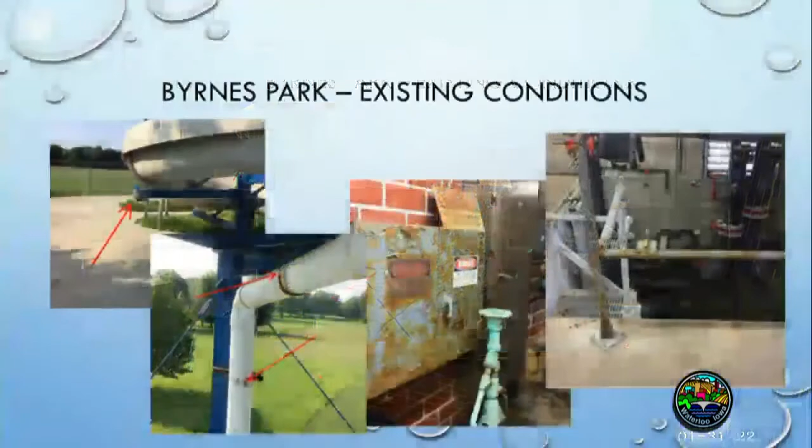Quick question for you - how many of you have been out and used these pools? So you see what I see then, and probably looked at it, but have you gone into, say, the pump room or looked at some of those pieces?

Anyway, going through the conditions - Byrnes Park, first of all, the 2 pools are basically the same age and same type. They are Chester aluminum pools, which means they have a concrete floor. They have an aluminum wall system, which is buttressed - in other words, there's a brace behind the wall panels that holds them in place. That's going to become important in a few minutes.

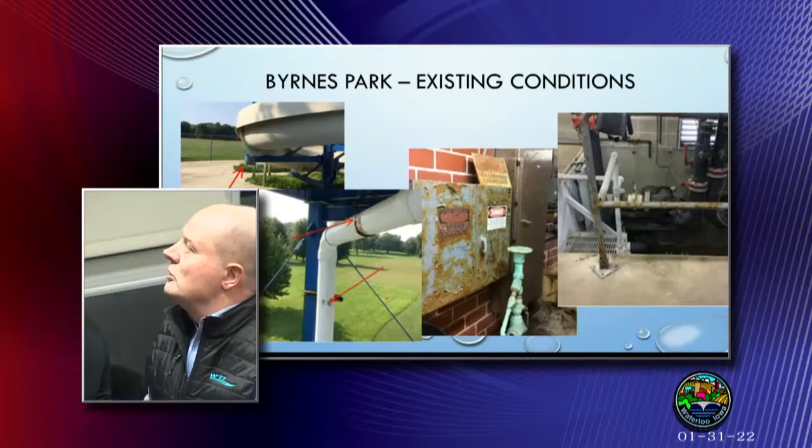General condition assessment is that they've been maintained, but maintained over the past 10 to 20 years by gosh and by golly. That's not anything about the staff - it's what they've had to work with and some of the challenges. For instance, in the images you're seeing of Byrnes here, piping is no longer supported - the pipe supports have rusted away. You have movement in pipe that could fail. Your electrical boxes are rusted, not only on the exterior, but you're probably going to start seeing some arcing in some of that. So condition is just generally poor.

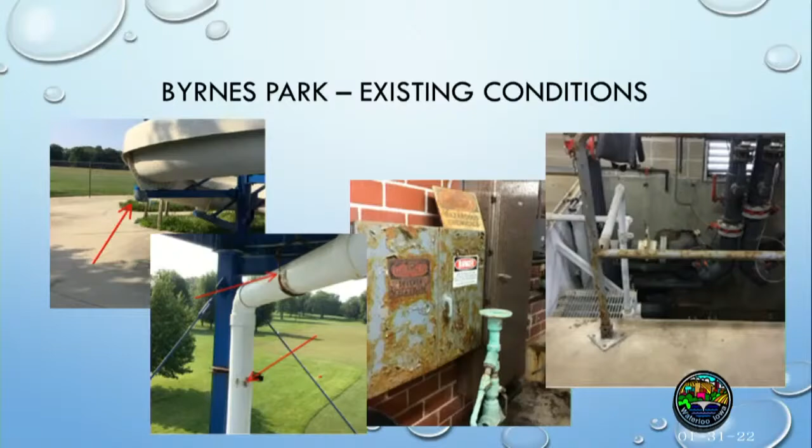Next slide. You got it? Oh boy, take care of it.

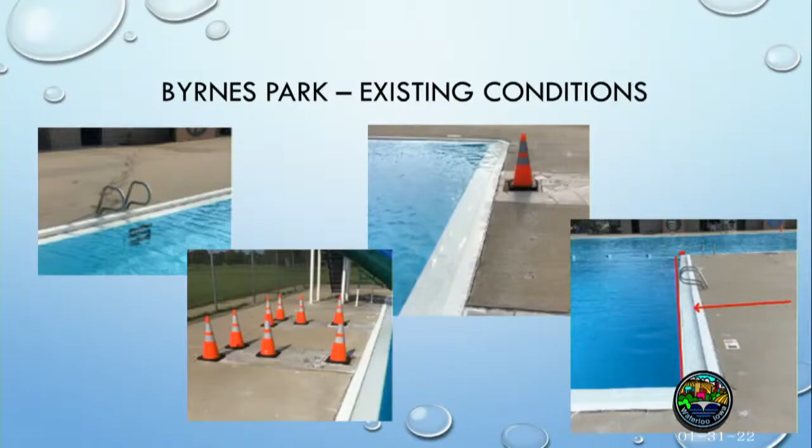In terms of the pool shell, the major thing is that you're starting to see bowing in the pool shell. Most of the time when people think of pool shells bowing, they think it's because of the water - the water weight pushing against that buttress. In this instance, what you've had is subsidence behind the pool wall, so water has gotten in there and caused some of the soil to sink. Now the bow is actually into the pool itself, which means those buttresses are no longer in compression - they're in tension, which is not how they're designed to operate. What happens is it opens up the joint between the deck and the pool wall, allowing more water to get in there. More water means more subsidence of the soil behind it. More subsidence means it bows out a little more, putting more tension on the system, imminently leading to failure.

And you can - whoops, I'm sorry.

Gates. No, I'm sorry, I was going to show something from the previous slide, but that's okay. Gates again. Some of the conditions are not cosmetic conditions. They aren't things that can just be polished or cleaned or buffed out and then repainted. It really is some serious conditions in terms of the deck, piping supports. The filters are outside. They're starting to unspool in terms of their fiberglass and things like that. So the condition is basically at the end of its useful life and should be planned accordingly.

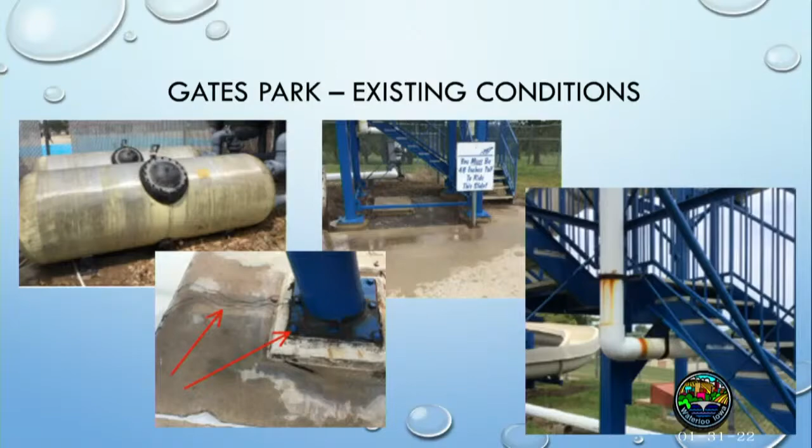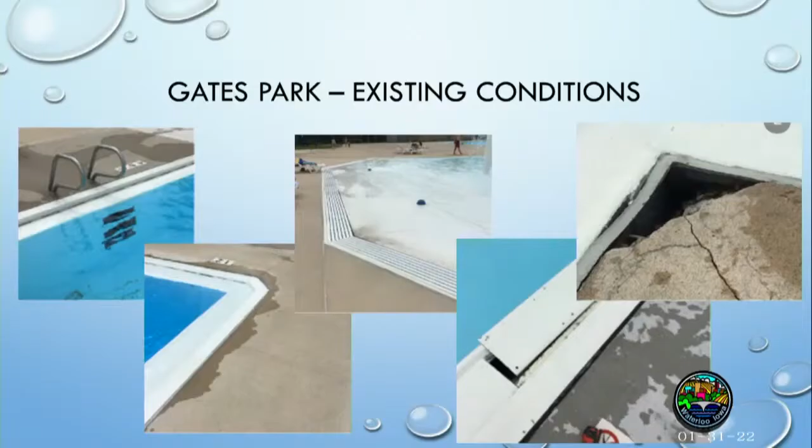You mean those steps weren't just because that's where you dive in? I'm sorry? Oh, man. Okay. Terrible. It's a big condition shift. Thanks, Matt.

To give you an idea of the process that we've gone through and where these things sort of fall, we started with our kickoff meeting and we've done market assessment data, we've done public input. Matt just talked about the on-site. We sort of bumped that to the front of the discussion because we felt like that sets the baseline for the rest of the discussion. We've gone through another set of public input, facility recommendations, and we've gone through some operational planning.

So one of the things that is important is to understand, whatever we do in the future, what kind of reality are we going to deal with in terms of revenue generation and cost centers and those types of things. So we are in the process of putting the draft master plan together.

When we started taking a look at the market, we looked at the city of Waterloo proper. We looked at a 5-mile radius surrounding the Cedar Valley Sports Complex and then 1-mile radius around each of the outdoor pools. You cannot do a study like this and ignore Cedar Falls. You have to at least acknowledge that it's there and that a percentage of your population is going to go there to use facilities and services. So we didn't highlight that, but that is something that's there.

There is a significant population. The diversity fluctuates based on the location, whether you're looking at the full city or just the area surrounding Gates or the area surrounding Byrnes. The median age is lower. That points to families. It points to the university. It points to people who use pools, who are around water, who like to be around water. And the income fluctuates as well.

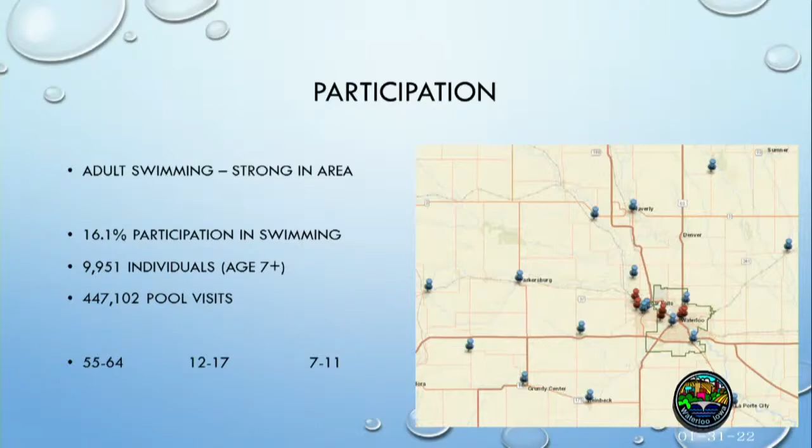Those age ranges that you see at the bottom: on a national level, the highest rate of participation in swimming is from the 55 to 64 age group, followed by the 12 to 17, followed by the 7 to 11. So when you start talking about that lower median age and the presence of those populations, that sort of backs up that participation percentage.

We did some fun, I call it fun, public input outside of the survey. We had a focus group meeting with the lifeguards. Their requests were pretty simple. We'd really like a clock that worked at the pool. We'd like Wi-Fi. We would like somebody to make sure that there's not bees, lifeguard stands that didn't feel like they were going to fall over.

So it took them about 20 minutes to get through that list before they started to dream. And then once they started to dream a little bit, we kind of had to pull back the reins and say, no, we can't put a sand volleyball court that floats in the middle of the pool. But anyways, they had fun with it, which was good.

But it was also fun to hear from them just some of the baseline things that we would assume a new facility has that would make their lives easier. So they're not struggling to the same degree that the Parks Department is to maintain the pools, but they're finding workarounds for some of the challenges that the facility presents.

In addition to that focus group, we did another series of focus groups and stakeholder meetings. We did an online survey. When we did that survey, we really focused on programs. We didn't ask people, do you want a 50-meter lane, or do you want a 25-yard lane, or do you want a stationary wave or a speed slide, or any of those kinds of things.

We focused on programs that could take place at an aquatics facility, with the idea being that if we focus on those programs, we can, with our knowledge and with help from Water Technology, prescribe bodies of water that could accommodate those programs and that could differentiate the facility from what they are now.

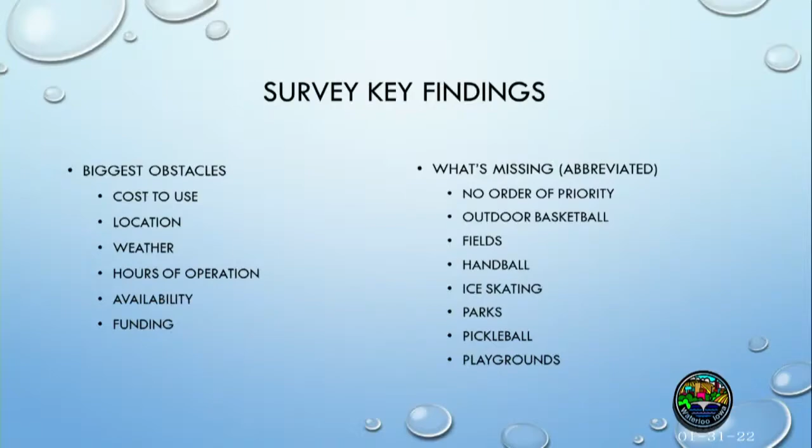We got to this point and we hadn't done operations, we reviewed operations. We reviewed the facilities. We'd done demographic work. We had done public input, and we all sort of looked at each other around the table. And I can't remember if it was Mark or Paul, but somebody asked the question, have we heard enough from folks that are either current or future users of Gates Park? And we hadn't. We just hadn't.

So working with the Parks and Recreation staff, we went ahead and did a special focus group for Gates Park and Gates Park Pool. Felicia is going to come up and talk a little bit about some of the things that we heard in that brainstorming session.

Good evening. Leisure Services took great time and great effort to actually talk to and listen to people that live here and use this park. And they were candid, sometimes difficult talks on, well, what's going to happen? What's happening with our pool? What are these next steps? And the cool part is they got to first ask, what do you want? What do you want to see? In your dream scenario, what do you want to see?

Now, we got awesome too, because one of our suggestions was a swim up bar, but as we moved through what was necessary and then got to dream, we were brought back. And so once we had a sketch, we were still involved in that part of the talk. The other piece is the neighborhood association was engaged, and even when there were follow-up questions, we had private Zoom calls to talk folks through this piece.

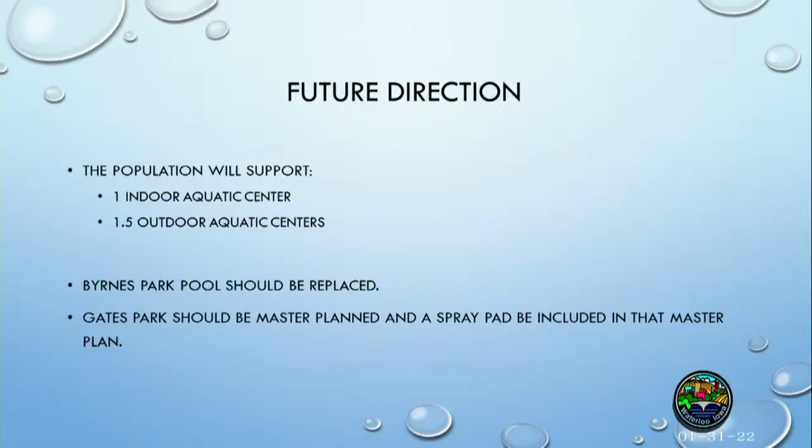But then we have all this other data that we've layered on top there as well. What we're talking about is that Byrnes Pool should be replaced in some way, shape, or form, and we have some suggestions for that. We're also talking about Gates Park being master planned and that a spray pad of some variety be included in that master plan. When we look at Byrnes Park first, what we recommended was 3 separate bodies of water. We looked at a 6-lane, 25-yard lap pool.

We looked at a lazy river with the catch pool for a slide tower, and then a zero depth entry pool. The fun part about that is that you can have multiple programs and multiple activities going on at the same time. Right now, with one body of water, there's not a lot of opportunity to do multiple activities. With this, we can have something going on in the current channel or lazy river, something in the zero depth entry, something in the lap pool, all simultaneously.

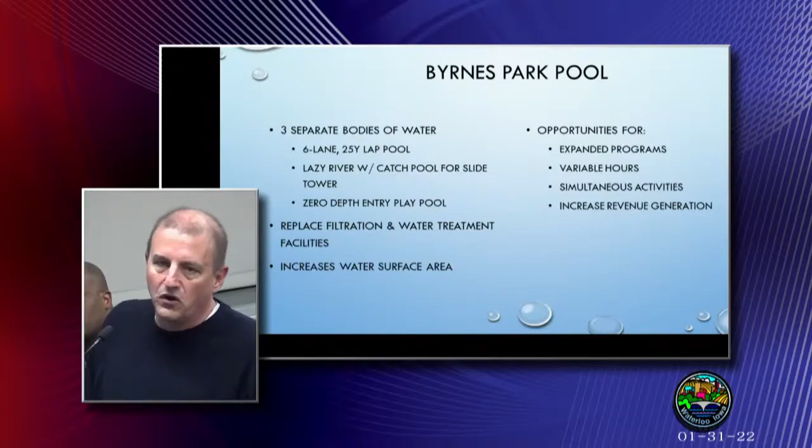Let's say that there's not enough lifeguards one evening. Well, we can close the lap pool and we can keep the zero depth entry and the current lazy river going. In the morning time, you can have people swimming laps and walking with the current channel. There's just a lot of opportunities for programs. You'd also have to replace filtration and water treatment. It would increase the total water surface area.

When we were on site, it was kind of interesting. You'd see everyone gathered in the shallow portion of the pool, making sure that I'm not talking too much, which I am. But not a lot of people were using the deep water, but we're still including that because that's important for lifeguard training, for some of that life skill stuff. But again, talking about some of the opportunities that are there.

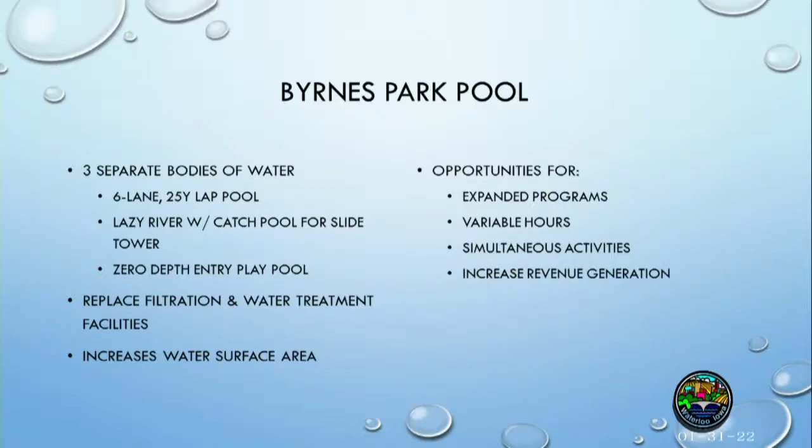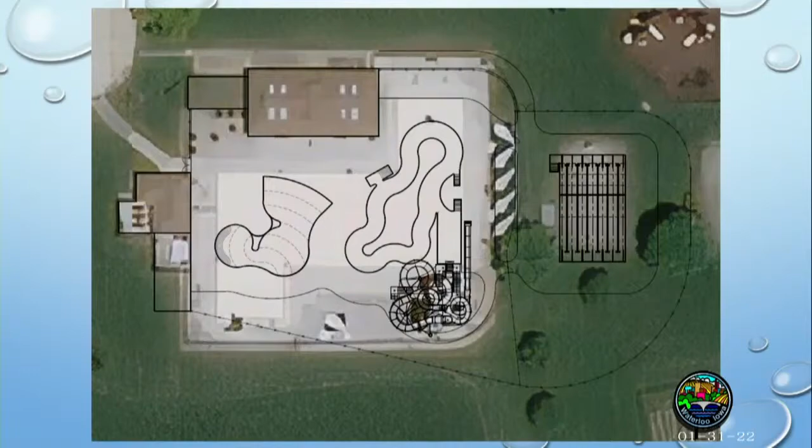When we talked about a spray pad, one specific in the Gates location, you already have one in the city and it's already really popular. So I think that's an important statement to make, that you've already established that there's a market for this type of facility in the community. And when we've done some research and been involved doing this across the community, spray pads have often been used to fill some equity gaps and to create more access across communities.

How they do that is expanded hours. This is something that would be a park amenity, right? So it's available from the time the sun comes up to the time the sun comes down. If somebody wanted to play in the spray pad at 10 a.m., unless there was maintenance being done or something else going on, that'd be a real possibility. Expanded operating season. In this portion of the country, you'd have those up and running in early May and could potentially run all the way through September. And what we were talking about is something that would be free to access.

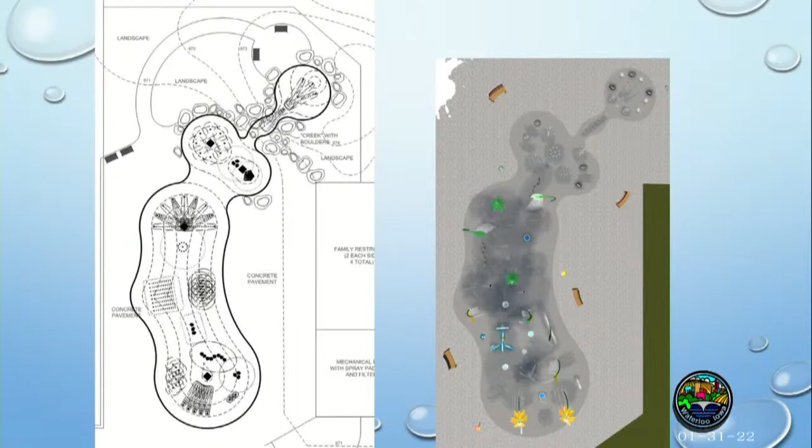So Water Technology has provided us with some images of approximate size or scope of what we've been talking about. This gives you a schematic and then a side-by-side with the schematic drawing and then an overview. We're not just talking about something that would bubble up and spray. It has some play features to it. We've seen these equipped with a theme of some variety. There's seating around the outside. There's shade around the outside. It is counterintuitive, but that's one of the number one things we hear when you talk about outdoor aquatics: we've got to have ample shade. Not everybody likes to get burnt like I do.

I always joke with people that the amount of money that I was willing to pay not to have the birthday party in my house was absurd and maybe obscene in some cases.

We're thinking about a well thought out structure that is going to enhance the rest of the park. And with enhancing the rest of Gates Park, the city worked with Ritland and Kuiper and had them do some master planning that gives you a little idea of what some of that dream process was looking like around Gates. So Mark's going to walk us through that.

And again, if there are questions as we go, that would be great as the slides are up there, but I'm going to go through the images and the concepts. They are going to come at you kind of fast, and I'll just try and illustrate or describe what's on the screen.

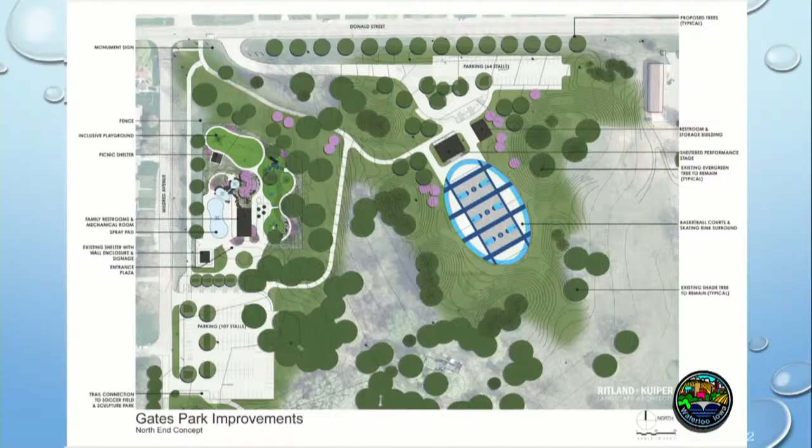The existing recreational trail that comes into the park from the northwest corner along Donald Street, that is maintained. We're actually connecting to that and creating access to the lower area where the splash pad and the inclusive playground would be located. And then that trail would connect to the upper area, which would then be an outdoor basketball area and also be a performance venue.

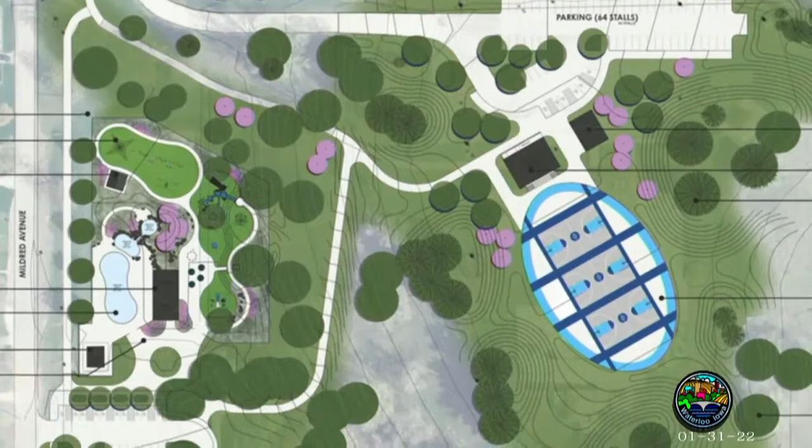There'd be opportunities for roller skating, to have outdoor concerts. And then that would also be a large picnic pavilion when it wasn't being used for one of those performances. And there'd be restroom support facilities for all those. So I'll kind of step through those as we go into the detailed plans for each.

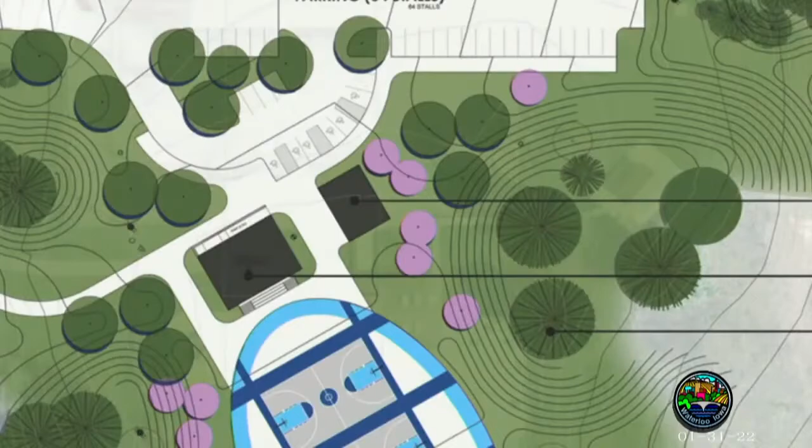Looking at the top portion now, so you see the basketball court facility. The performance pavilion would be in the center of the screen, the larger structure, and the restroom would be adjacent to that. It'd be accessible parking. It's kind of hard to visualize right now, but right now where the pool is located is on a very high elevation. It's actually about 15 feet above Donald Street, and so we're actually dropping that about 8 feet.

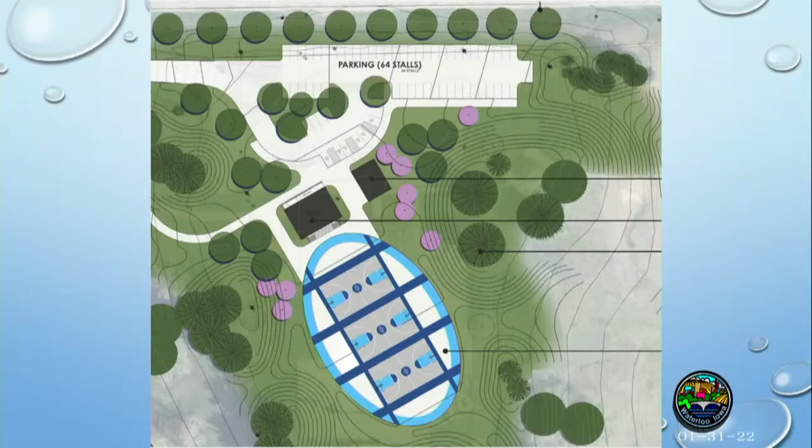And by doing that, we actually create this amphitheater effect. So the idea would be we would preserve the existing vegetation, these large, beautiful trees that are there, because those are around the pool. But by pressing that area down, we create this amphitheater effect that not only is amazing for being in that space, but also provides the noise attenuation. It'll be great for neighbors, it'll be great for golfers.

The idea is just to create an awesome outdoor venue protected somewhat from the elements, providing some of that sound control, but also just being downright beautiful to be in. And I played in the Gates Park Youth Basketball League, and so the idea of being in this venue, playing in that, it makes me want to get my shoes back on.

We'll hold you to that. Yeah, yeah, that won't be hard.

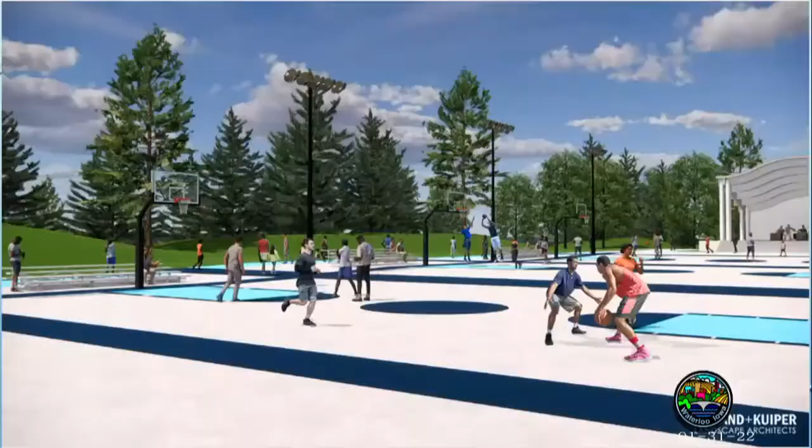So that's kind of that space. And again, we can come back to these, I'd love to spend more time on each one, but kind of a detailed view, then if you're down on the court, what that would feel like being in that space. Our hope is that it would be lit and there'd be good sound and lighting for that stage, and that would just be a great space to be in.

Then moving on to the lower level, we kind of had a preview of the splash pad look. I'll look at that, as well as the inclusive playground. And those are both served off of that parking lot by an entry plaza. And then the idea would be that both of these areas would be gated and fenced separately.

So a parent could be in the splash pad area, and they would be able to sit near the entrance to that and know when their child is in the splash pad area and know when they were going to leave and be given permission to do so. And then be able to go over to the inclusive playground and back and forth.

But the idea is that you wouldn't be able to really get in there except for that one entry for both areas. The building in the middle would have 4 separate family restrooms, as well as the mechanical room that serves the pump and filtration system for the spray pad.

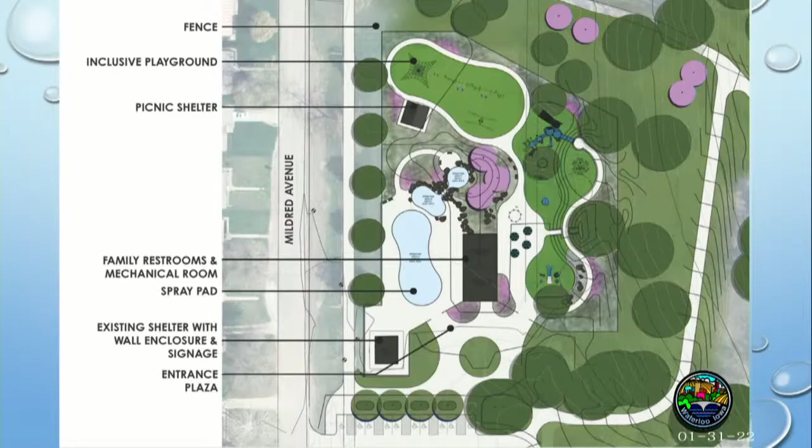So the spray pad itself, the idea is that we'd have those spray features, and there's actually a change in elevation to that. The hope would be we'd have spray features slightly on an elevated plane, and the water would be able to trickle down in a really slow-moving stream that kids could play with, and maybe even manipulate the water. Just having that change of grade and working it into the grade, having the mounds behind it with the stone and the plants nearby, but also protecting those water areas from interacting with mulch. So working with the consultants to make sure those entities work well together.

To go into just a bit of detail, the pathway that winds on the right-hand side, that kind of looks like a snake with a circle on top, that's actually a slow-moving ramp that ascends 6 feet to the top, and then forms a bridge access to the top of the play structure.

So the idea is that anybody with any kind of physical disability would be able to access the coolest parts of this park, and that's part of the inclusivity, not just providing handicap access, which is kind of the way accessibility starts, and I think that's a great step.

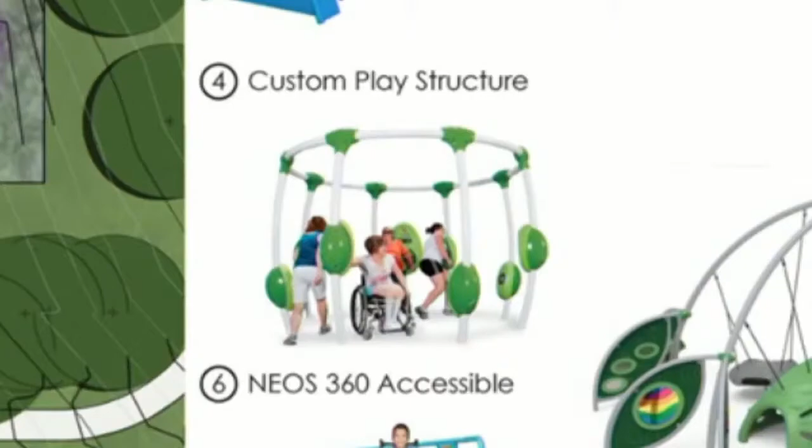But like I said, I could walk through all those. The custom play structure is kind of a concept, but that's what that might look like. There's a tall, 18-foot tall net climber. Again, just lots of different abilities for kids to explore.

As that path winds its way up, it goes past a large existing tree, and we actually preserved the tree roots there and protected them from the berm that it works through. But it gave us an opportunity to create this play tunnel, which is number 10. So the idea would be that area underneath that tree would be a hidden area where a kid could go in there and just have quiet space, pretend play.

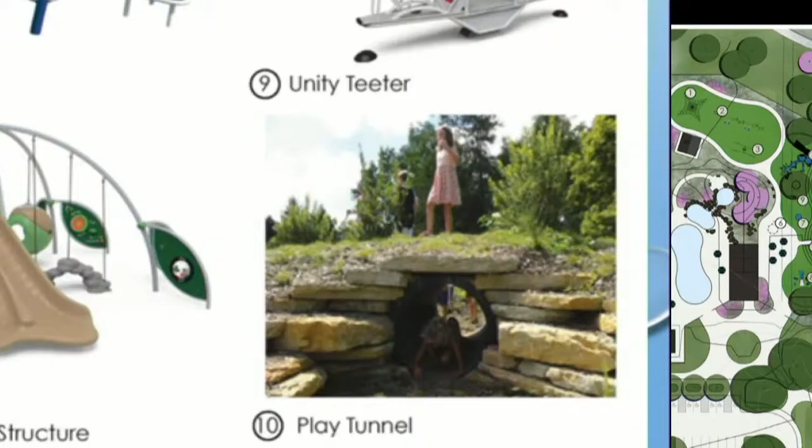You could have pretend play over that bridge. And the idea of working this whole design into the existing grades, utilizing the existing trees that are there, really makes it personal and unique to its space. And that's really part of any great design. It looks like it's been there a long time. It looks like it was designed with this intent. It's not a flat plane that you could have rolled out from any factory. It's really unique to the site.

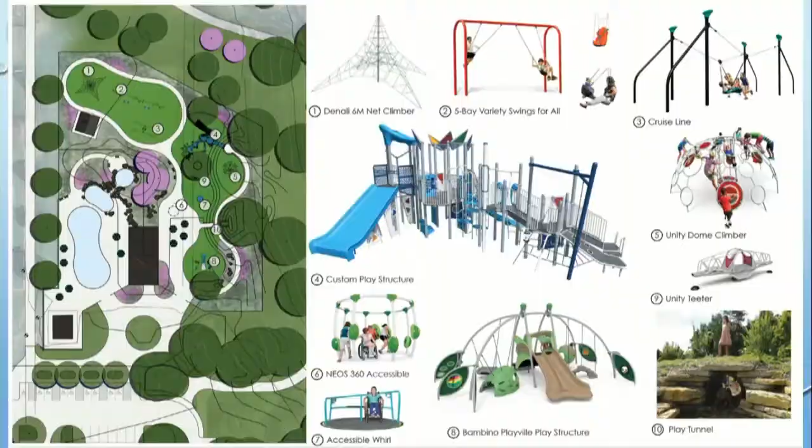Yeah, I'm super passionate about that, so I could talk about that for hours, but I'm not going to do that. The area then connecting, I'll call this, this is really a cool concept that's developed, and I'd say that Felicia's been a big brainchild behind this whole thing. The idea is not only making the connection, we see a recreational trail connection being huge between these vast spaces of Gates Park, right? Getting between them is really difficult.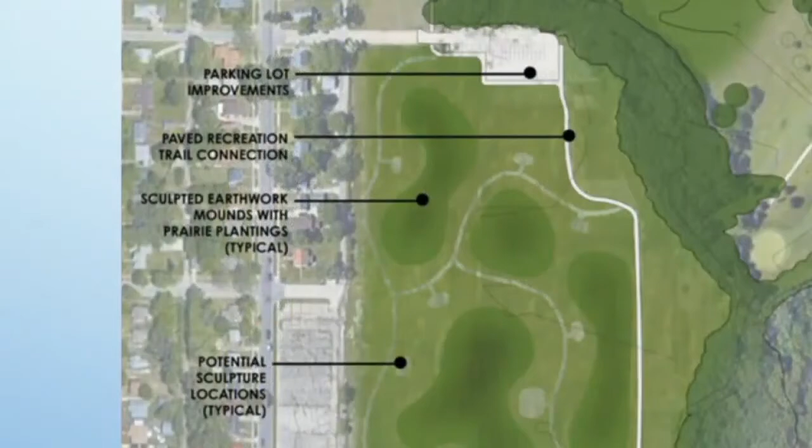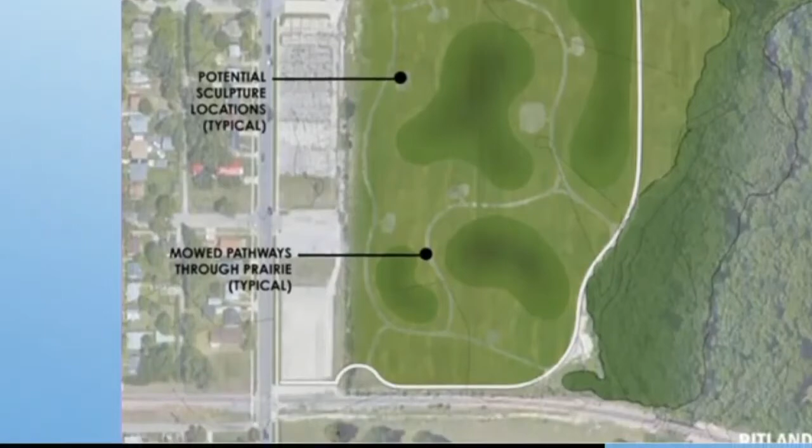So making that recreational trail connection, part of cutting off all of that soil off of the top of where Gates Pool is right now creates this opportunity to use that soil for something. And so not only to augment some of these constructions that we're proposing, but also creating actually earth sculptures and a prairie in this area. So the idea would be this would be an area with rolling hills with prairie on it.

And then our thinking is that at first there might be mowed paths through this thing and some interpretive opportunities, not only for the nature aspect of it, but also for the African-American history that we want to interpret in this region, not only contextually with people that immigrated here and their stories, but just even some of the wider stories that are happening both now and have happened in the past.

So this provides opportunities actually for a sculpture park. So we're calling this a sculpture park. The idea is that within these winding paths in the prairie, there'd be openings, there'd be opportunities for interpretive sculpture exhibits, and they could be of really any scale that you could imagine, and obviously the fundraising and all that goes into that. But the opportunities are there to really create a very unique venue, not only just making connective space, but actually making that something super unique to this area.

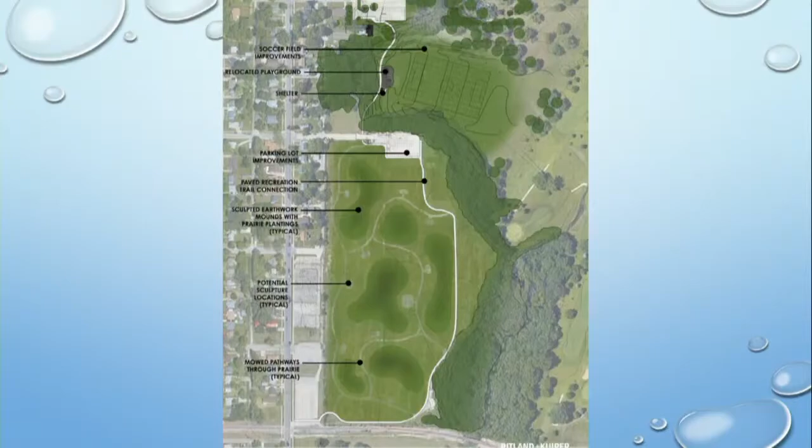And then we're connecting to just a little bit more detail. The existing soccer field actually has basically no drainage. We'd be looking at ways of trying to get that to drain properly and actually serve the soccer functions better than they do now. Likewise, the parking and everything, it's sort of a gravel lot, just hasn't had a lot of investment, but it does have a lot of use, particularly the Hispanic Soccer League uses that a lot.

And so we really see this. We do need to relocate some playground equipment that's in the parking lot just north of here. This provides an opportunity to have that playground and a shelter located adjacent to that soccer field, served by parking lots north and south. The idea would be that groups could have events and host events and actually have their own parking spaces and their own uses, renting out that shelter and using that space. And I kind of talked about the sculpture park already, so I'll probably move beyond that.

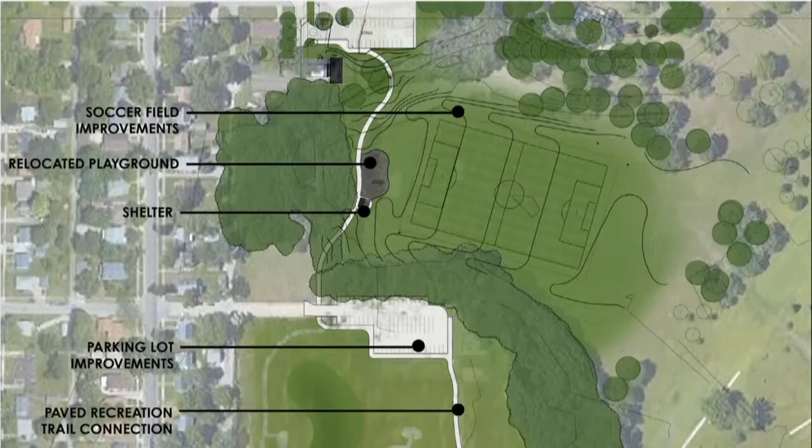Going then to the south end of Gates, obviously that's had some recent improvements with the flood wall that was installed there, and part of this is recognizing the fact that the rest of that park really just needs a look, because it used to be where the Gates Park Basketball League was, but it's not there now, and it's not being used in that way. And it's really just not the aesthetic that the neighbors or even the region would like to have.

So what we looked at here was a small organized parking lot. Again, trail connections. There's not currently a sidewalk from 4th Street over to this space, and we think that'd be really important for walkability to have a sidewalk on this side of the street. We would propose a series of mounds and trees through that area, again, utilizing the soil we brought from that north end where we cut that hill down. That provides us an opportunity to do some earth sculpting here, and what that does is really effectively screen that wall from view. From the street, you just have the look of those rolling mounds and these trees, and you wouldn't really even notice that the wall was there.

We are relocating playground equipment out of the floodway area, keeping the existing shelter and adding another small one. And then the existing restroom is probably in about the same condition as the pools, and so it needs to go away, and we're looking at a new restroom there and a half-court basketball with the idea that folks could be having a basketball tournament or some other event going on the top of the hill on the north side, but kids still want to go from the neighborhood and shoot baskets. We'd have an opportunity to do that here.

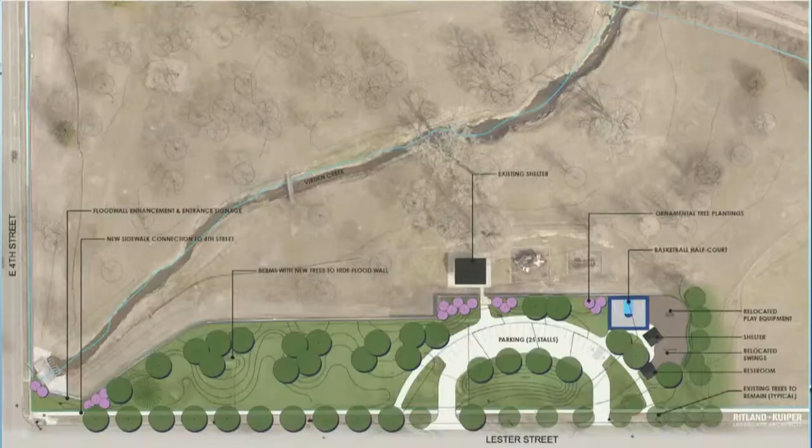And then on the corner, as it narrows down next to 4th and Lester, the wall is tallest there, and it's really hard to hide with any kind of vegetation. So we thought, this does provide us an opportunity. We need some signage, right? And so we looked at the existing conditions, and we looked at what would we do if we transformed that using the signage approach that we've used elsewhere, like on University Avenue.

That really does provide an opportunity with the new sidewalk, some trees, with the mounds hiding the wall for the rest of the park. On this end, we can dress that up, just put a facing on the wall. Right now it's a good fabric to put something beautiful on it. That could be artwork going up 4th Street, some sort of art project, or more of this veneer look. We just haven't explored what those options are.

But we were asked to take a stab at what a master plan would look like, ignoring budget, sort of trying to think about what kinds of amenities Gates Park could offer, given the amount of land it is, given the importance it's had historically, given the needs of the wider park system. What does the Waterloo Park system need? So these are the kinds of things we plugged in.

A great inclusive playground, I'd put it up with anything around. The splash pad, again providing accessibility. That basketball venue is going to be amazing. And then the sculpture park, which would be totally unique. And then just fixing up things that haven't been looked at, really bringing them up to the standards of Waterloo.